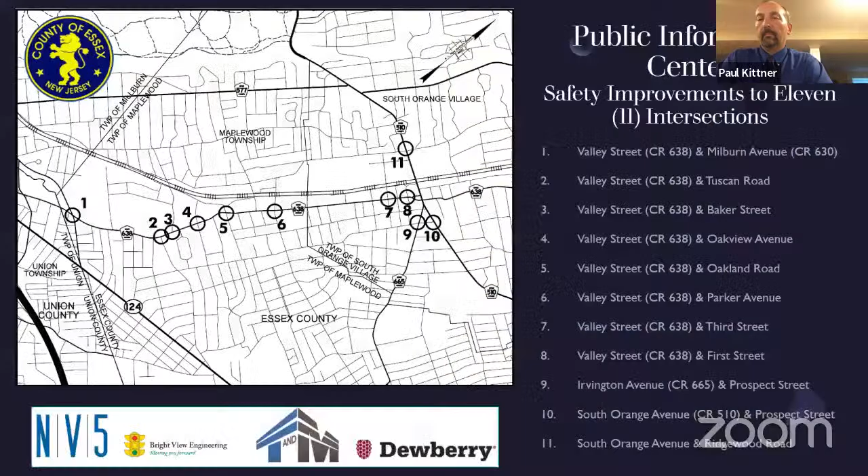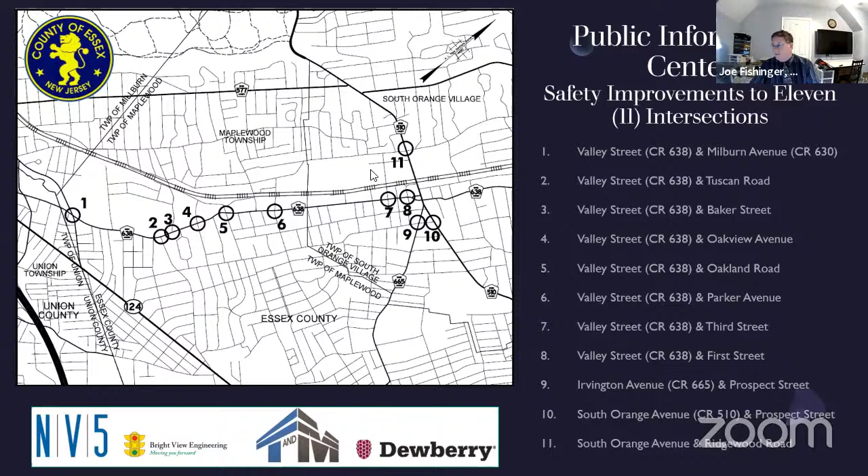We're the lead designer on this project. As Asif mentioned, there are actually a number of projects that came out of this latest grant application. So what I want to talk to you today and go through with these 11 intersections is basically why we're doing the project, where the money's coming from, get into some of the specifics of what we're doing with the various intersections, and then go over briefly where we are in the process and what happens next.

I won't bore you reading this paragraph, but essentially the purpose of this project is to improve safety. We want to improve both pedestrian and vehicle safety, bring the intersections up to current standards, make sure they have the right signal equipment, countdown pedestrian heads, push buttons in the right place, at the same time meet current ADA standards — basically bring the signals up to the 21st century.

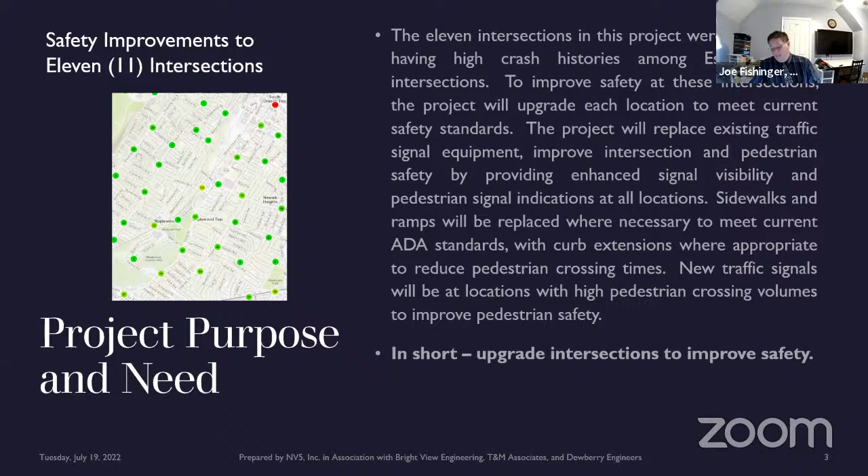So where this comes from, as Asif mentioned, is through a grant program from the NJTPA. It wouldn't be a federal project if there weren't acronyms involved. But the NJTPA, one of their functions, serves as a liaison between the federal government and federal funding and the local jurisdictions — in our case, Essex County. So the initial funding for the grant application was provided both by Essex County and some directly from NJTPA.

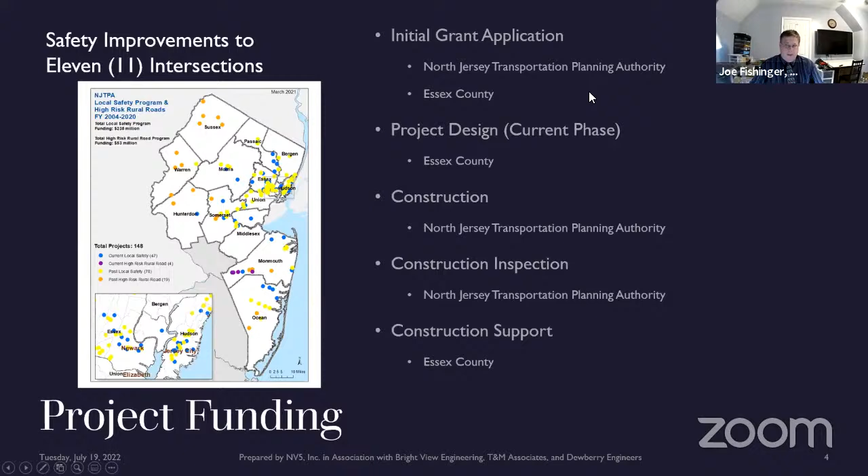Right now, as Asif mentioned, we're through the design phase. We're almost done with our design, getting final inputs on how the design's going to be done, and that's funded through the county. Then the construction — that $5 million number that you heard Asif mention — that's being funded through the federal government through the grant from the NJTPA. The county still has some additional funding obligations during construction as support functions to make sure all the paperwork gets done. It's the federal government, there's always paperwork.

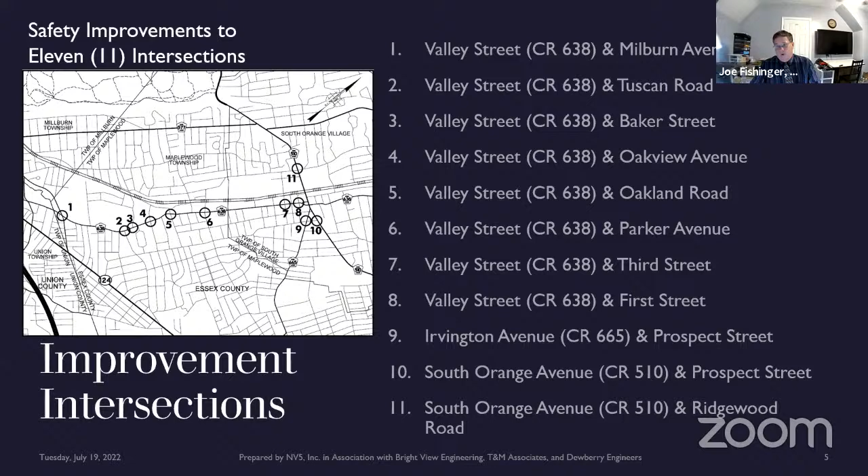As Asif mentioned, there's 11 intersections in the study area — 8 on Valley Street, and then 3 in South Orange in that general vicinity. The way this segment was selected is the county actually got funding for 38 intersections scattered throughout the county, and the projects were broken up into 4 different sections just to make them a little more manageable. So we put everything on Valley Street together along with a few other intersections within South Orange.

So overall, the types of improvements we're looking at: replacing all the traffic signal equipment, black poles with 12-inch LED heads with retro-reflective backplates, sidewalk improvements, in a few locations curb bump outs where they're appropriate, high visibility crosswalks, upgrading some of the storm system. I include intersection paving on this — that's not really a safety benefit, but it's part of the project because we're going to cause problems at the intersection. We're going to rip up the pavement when we put in all the new equipment, so we want to fix it when we're done. We'll also be paving each of the intersections.

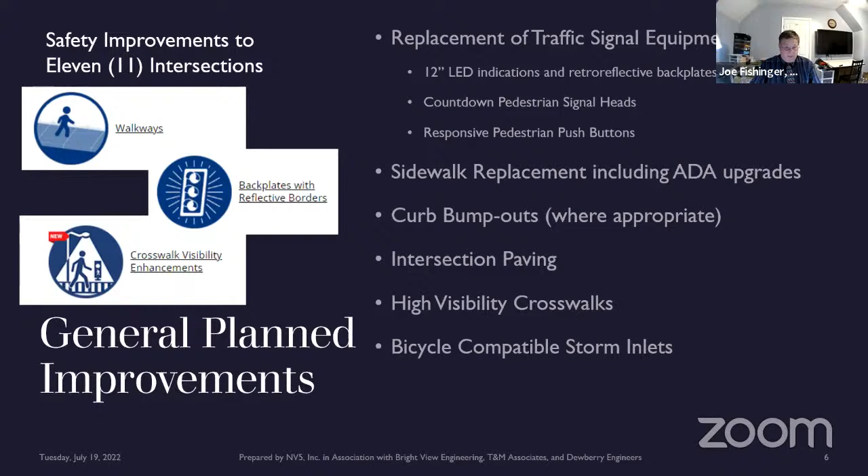To give you a good general idea, Valley and Pearson — that signal was done, recently completed earlier this year. That came from a similar program. So that signal, what you're seeing as far as the poles, the type of signal heads, the push buttons — that's the type of thing that will be at the rest of the corridor. That signal was done earlier than the rest of these, but we're looking at the rest of the signals on Valley Street and upgrading them to similar standards.

So to go through some of the specifics, and I will go through this very quickly — I know everyone's time is valuable. If there are specific questions, we can always go back.

Starting at Milburn Avenue on our southern end of the corridor, we'll be replacing the signal equipment, repaving the intersection, sidewalk ramps, curbs. The darker black area you see on the aerial is our approximate paving limits. All of the signal equipment is shown in orange — that's just so it can be seen, but to give you an idea of the impacts, in general on these projects we're trying to stay within the existing roadway. We're looking not to take property from anyone. We're trying to bring things up to current standards within the footprint that we have to work with.

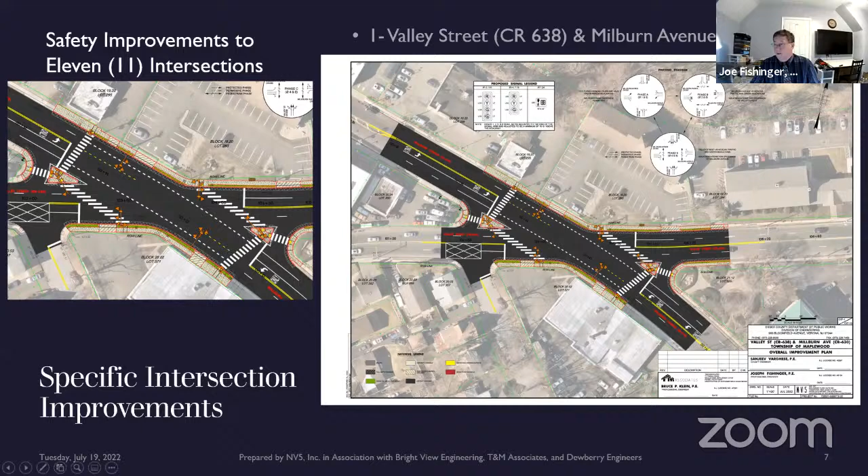All of the signals along this corridor will be connected into the county's interconnected signal system. We actually put cell modems in the signal controllers now. They report back to a central monitoring system at the county's offices so that they talk to each other and can be monitored and adjusted as necessary straight from Essex County's offices. We don't even necessarily have to send a technician out.

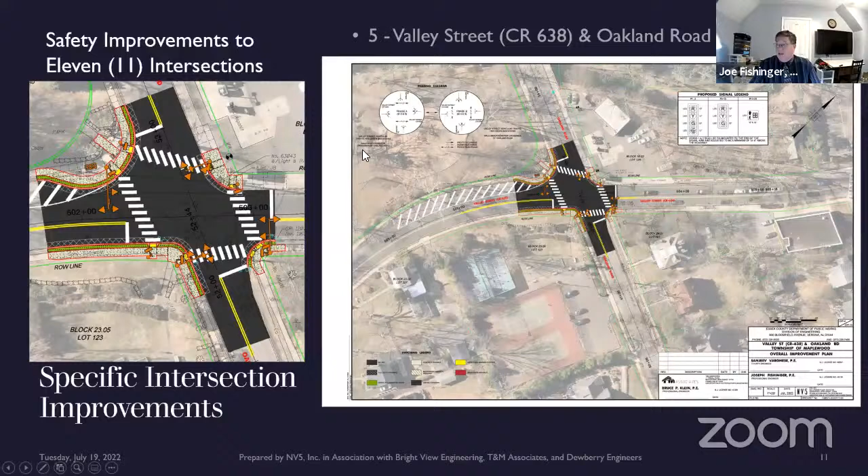But I wanted to point that out so you know we haven't forgotten about it. Moving on to Oakland, similar theme as far as what we're doing here. One change on the southwest corner of the intersection where the park is—we're going to be pulling the curb line in. There's a small section of Valley through there that gets very wide, and we're trying to bring that curb return in to shorten the pedestrian crossings and make things a little more pedestrian friendly throughout the intersection.

And then going on to Parker, near the high school—similar configuration, we're looking to replace a lot of the sidewalk in the area and install new signal equipment. We're trying the best we can on the west side of Valley; the sidewalk there is very narrow as it is, so we're working within that area to get things replaced as best as possible. Again, this will all be similar to the equipment at Valley and Pearson, with black powder-coated signal poles.

And then as we move on to the intersections in South Orange, 3rd Street—again we'll be replacing the intersection, and adding some pedestrian bump outs. That serves two purposes: shortening the pedestrian crossings and tightening up the intersection, but it also gives us more room to get the equipment in that we need. These green lines are the property lines, so in some cases we need to adjust the roadway configuration to get the signal equipment and everything within the existing property line, so we don't have to take property from any of the adjacent owners.

Moving on to 1st Street, this is actually going to be a new traffic signal. Both sides of the intersection are one-way away from the intersection, so this signal is for pedestrians only—somebody comes up and pushes the button, or during the day it's pre-timed, and traffic will stop to allow pedestrians to cross here. In order to get the signal equipment in, we're adding bump outs to the intersection, narrowing things down. A lot of the light blue squares and circles you see are new drainage equipment.

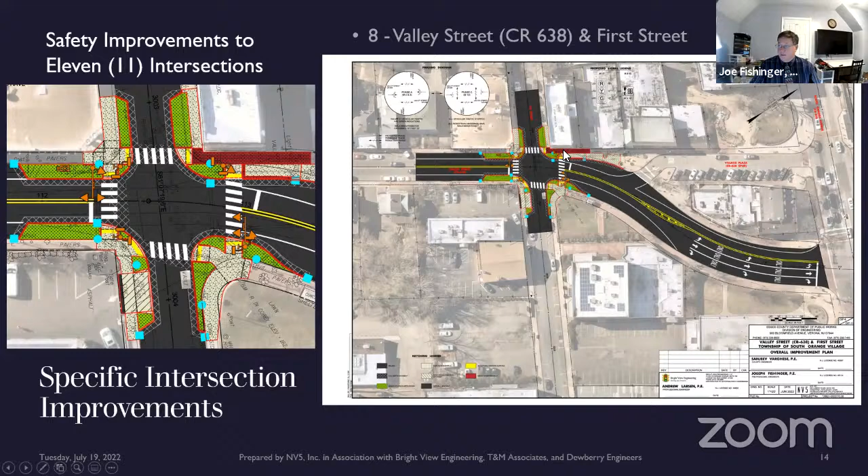We'll restripe the area consistent with changes that were already made on the other side of South Orange Avenue. There's only one through lane coming through now, so we can reclaim that second through lane to better align the intersection.

The other intersections in South Orange that aren't on Valley Street, Irvington and Prospect, similar situation. We'll be repaving it, modifying the curb lines. In this case as well, we're also bringing a few of the curb lines in, particularly the southeast corner, to give us a little more room for our equipment and try to shorten some of the pedestrian crossings.

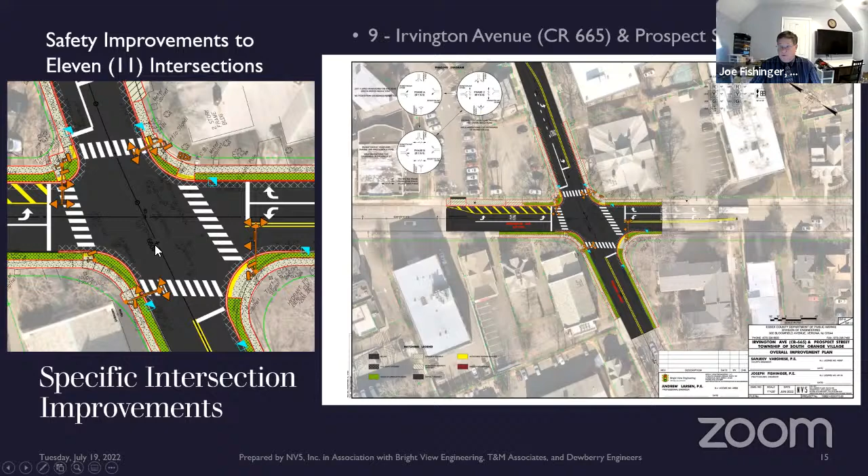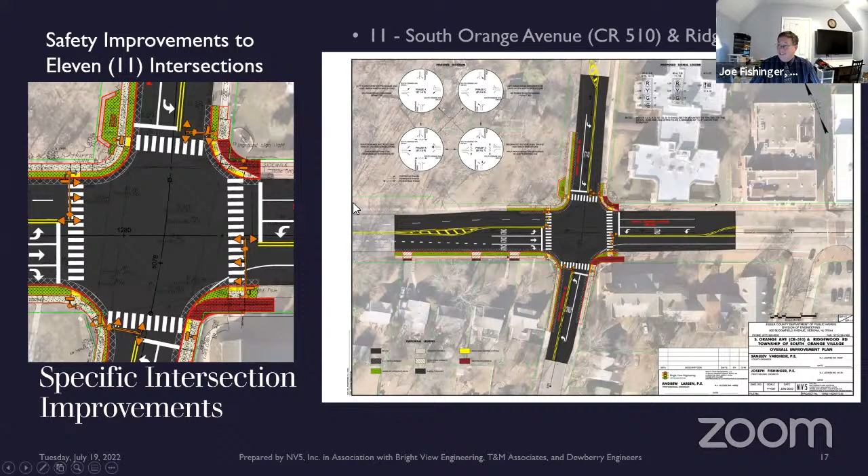And then lastly, at South Orange Avenue and Ridgewood, a similar situation. We'll be redoing the intersection.

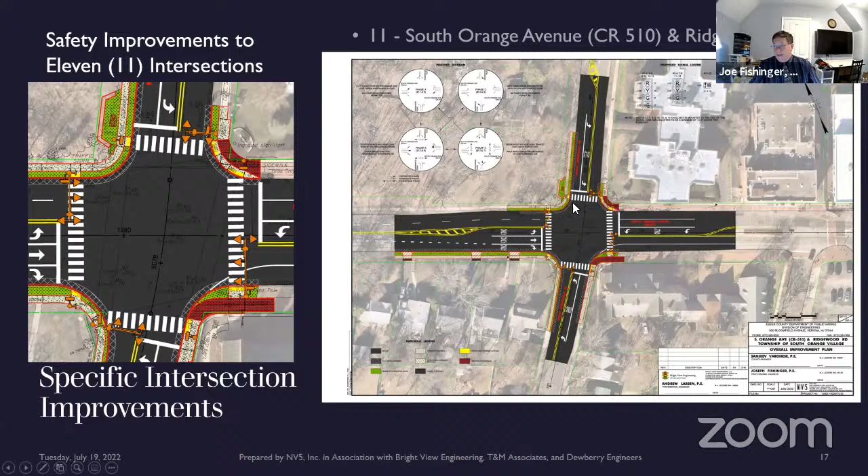There is one thing we noted that was not in our original plans, or didn't make it onto this sketch, but we will add it: since our original survey, don't block the box striping has been added at this intersection. So we'll make sure that gets back onto the plan so it can be added back into the project as well.

So where we are, kind of the idea of where we are in the process: we're almost done developing plans. We have design plans into the county for review. They're checking them to make sure that we did our job and met all the requirements.

The next step after that is we have these sorts of meetings where we're getting some input from the public, some comments, and then we have to get all of our required approvals.

We also have our environmental document into NJDOT for review right now. These sorts of meetings are part of the requirements to complete that document, to make sure our environmental review confirms we're not adversely affecting anything as part of the project. That's part of the requirements for a federally funded project.

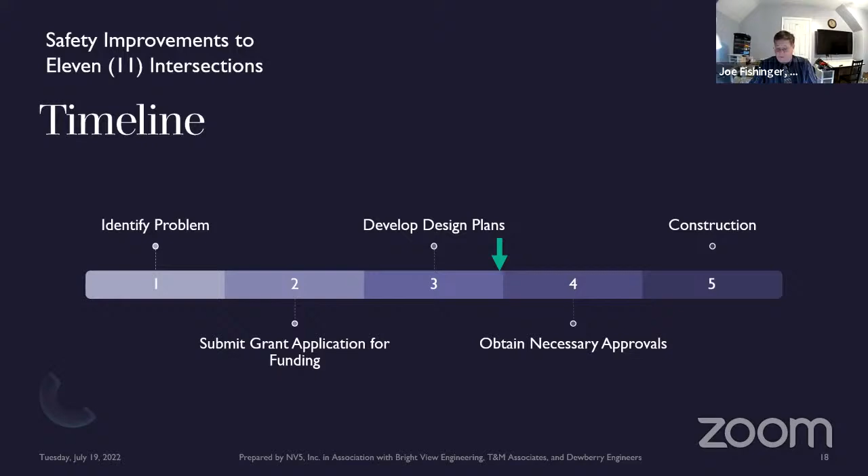And then, of course, once we have all our approvals in place, we'll go to construction. So where we stand, our next steps will be to address any comments we receive from this meeting and other public input we get, as well as any changes that may have to happen from the environmental documents.

Then we're looking to submit what's called a PS&E, plan specs and estimate, to NJDOT in September. The state needs to approve the project before we can go to bid. We're expecting we'll get that notice late this year, in the November timeframe.

That'll allow the county to go through its bidding process and retain a contractor over the winter, with construction to start March of next year. We're expecting it'll take around six months to complete the project. And then the end of 2023 is when we deal with all of the closeout paperwork and finish up the federal grant.

So I apologize for going quickly. I'm here to address any questions or comments you have.

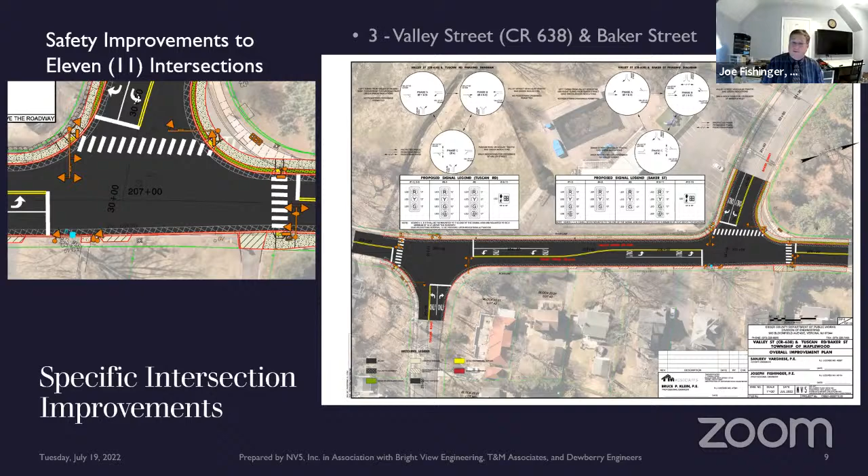So where we are in this process, the intersections have not been built. That's the whole point of this process, to hear everyone's comments and suggestions. As we finalize the plans, we can work with your engineer and with Paul to confirm what the town is looking for, accommodating to the best we can within the limits. As Asif pointed out, we're very sensitive to not wanting to take property, both from the standpoint of not wanting to take people's property, and because that adds years to the process. So we're trying to work within the guidelines to get this delivered the right way, but also in a timely manner.

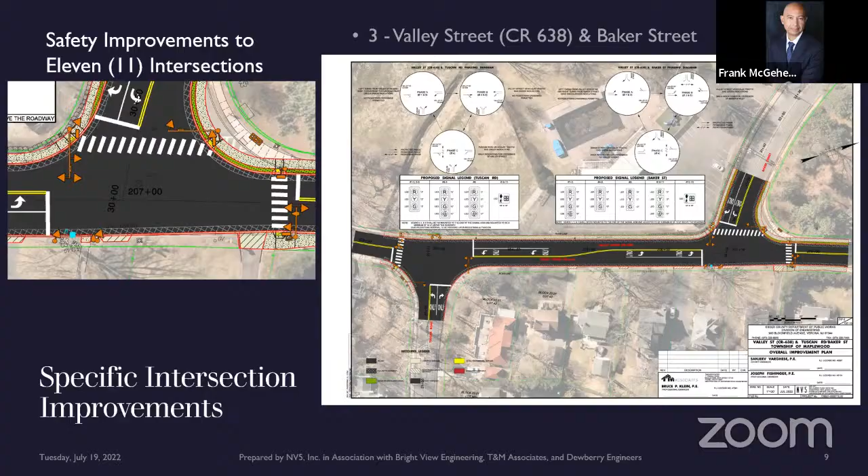That's perfect, yes, I appreciate it. So one more question, can I share my screen? I don't know who's sharing. Can I stop sharing for a second? Amazing, thank you, all right.

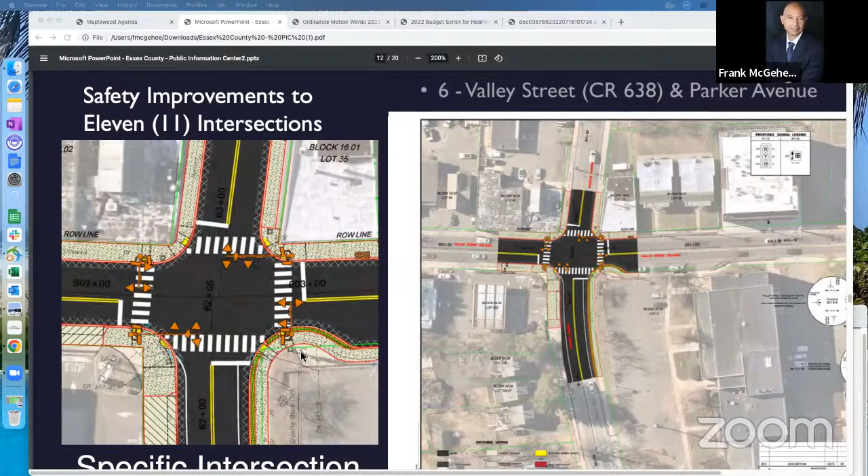So I have a question about another intersection, also more school related, by Parker and Valley at Columbia High School. I noticed in the design, you put the bump out in, which I understand the rationale provided. But one of the problems we have, and I know this firsthand having a child at Columbia High School, is a huge pileup of people trying to turn off of Parker onto Valley, and also the other way. As I see these bump outs softening and narrowing it, I'm wondering if we can go in the opposite direction and widen it, almost to the point where you could put a three-way turn in here.

I'm not an engineer, but there's a lot of bottleneck there. As many people know, we're going to be doing a development right up here, which is only going to add to some of the traffic volume. So since we're in assessment mode and nothing's ironclad, can we look at another version where we widen these arteries on Parker to help relieve some of that traffic during 9 or 10 months of the school year, and also on Valley as well.

So that's something we'll talk to Essex County about and see what we can do. I'll be honest, one issue will be confirming if we have enough property to even consider that. I know we already have right-of-way issues at this intersection. In fact, the existing traffic signal on the corner of the high school isn't even on county right-of-way. But that's something we'll talk to the county about and see if widening to provide that left turn is feasible. I know on the opposite side of Parker, because of the locations of the buildings, we wouldn't be able to put the corresponding left turn to go towards South Orange, but that's something we can look at before we finalize the plans.

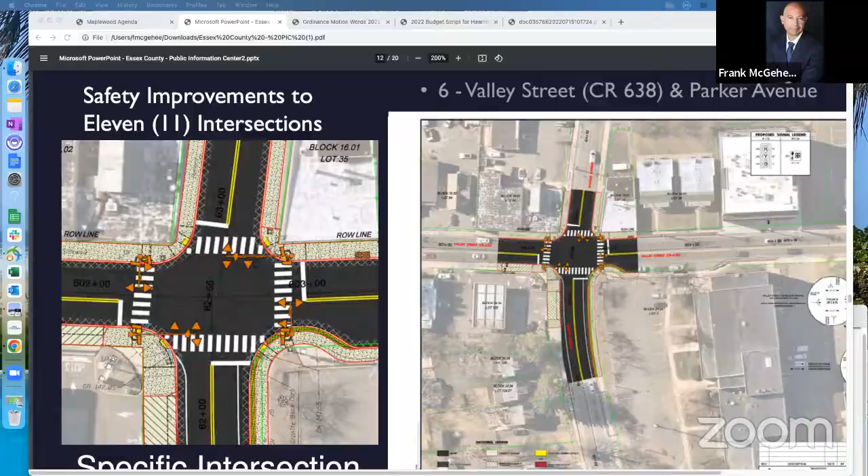Thank you, Committee Member McGehee. I want to go back to Committee Member Adams, who I'm not sure was finished with her questions. Thank you, Mayor, no, I wasn't.

I just wanted to ask a couple more questions about, and I appreciate Paul bringing our concerns about Baker, and we certainly don't want you to take property where it can be helped. I think there might be room to shift those two lanes and still get the turning radius.

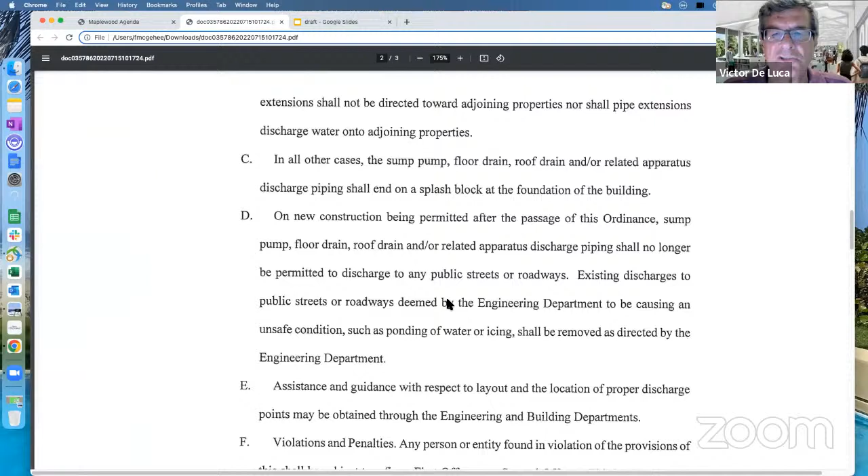So if you go to the second sentence, it would be existing discharges deemed to be causing an unsafe condition, such as ponding of water or icing. So we have empirical evidence of the problem. And we know that right now, in our evaluation of this, we received information from Public Works that there is roughly 6 to 10 homes that we have significant ponding and we have icing that requires us to send out salt trucks. So we know these homes and these streets. So we will be able to identify them right away because we have a history of doing this, and we'll be able to work with those property owners to try to address some other way to get that sump pump to discharge.

Understood. So this gives John and our team some teeth to address those problem areas. Right, end of the day. Okay, perfect. Thanks, that's all my question.

To that point, Mr. DeLuca, I believe it shall be removed as directed by engineering and building. Should probably change that, what does it say? Just engineering. I actually thought we took building out of it. Did we? I think I had building in, and I think our perception was... No, I'm sorry, I take it back, you're right. Engineering and building, that's fine. Yes, because they'll need building permits and things like that anyway. So our goal was to have engineering and building work together on issues like this. Okay, yep, got it.

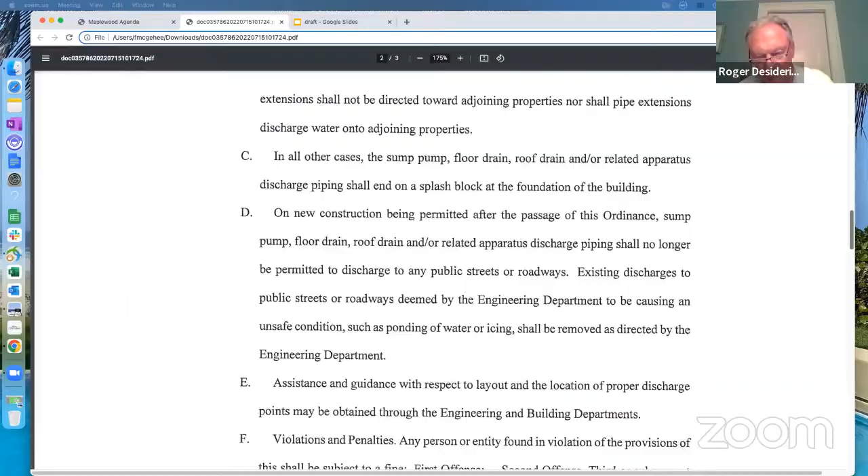Okay, so Mayor, I think we're ready to put it on for the next meeting.

Could I address one comment by committee member McGehee? I think he was asking how would they know about this, and I just want to clarify one thing. I think in most cases, most residents are going to hire a contractor to do this work, and most contractors know to apply for a road opening permit when they're doing work within our right of way. So I think that would trigger that permit, and we would certainly inform the contractor at the time that it's required. So I just wanted to clarify that.

Thank you, Mr. Kidner. And I think really Mr. DeLuca's narrative really gave me the crux of the matter here, and I appreciate it.

Mr. Kidner, just one last point. It's not just icing. The icing and the constant water flow does long-term damage to the roadway, damages the curbs, damages the gutters. So the long-term effect is year-round, and something we end up having to reconstruct.

Thank you for that point. And yes, when it is significant, it could cause long-term damage to our roads. Invariably, when you look at sump pump discharges that are significant, there's usually settlement and there's usually potholes in those areas. So it does deteriorate our roads prematurely and cause significant damage to them.